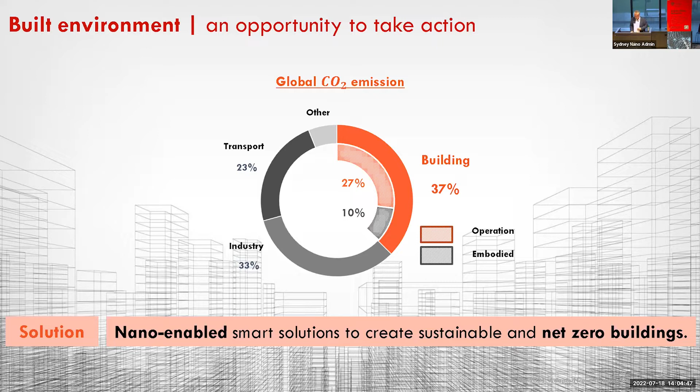Significant. Our hypothesis is that nano-enabled smart solutions are key to enabling sustainability in net zero buildings, and you'll hear more about that from Sydney Nano researchers in the session this afternoon. So Sydney Nano has started a conversation that is around and about reimagining buildings. The Smart Sustainable Building Network is integrating technology, nanotechnology in particular, and IoT to provide solutions to the issues of inefficiency in building construction and use. And of course, that can be broken down in terms of design, construction and operation, and that cascades to a number of benefits that you'll hear about.

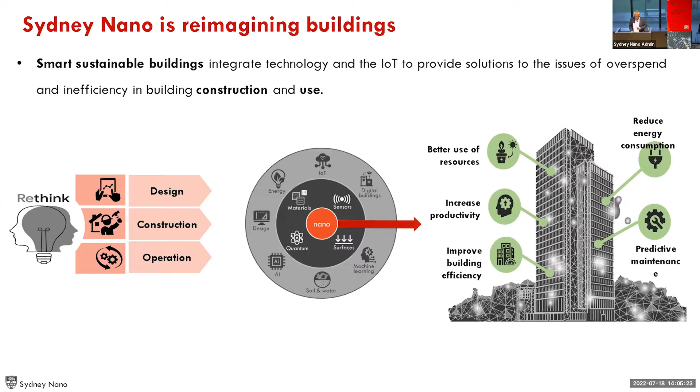And I note the time, so I will wrap up and move to the speaker very soon. Today, you're going to hear from a number of my colleagues across the university exemplifying leading edge research being undertaken here at the University of Sydney and various faculties and schools as part of the Smart Sustainable Building Network. And I look forward to those presentations.

Finally, to be very clear about the purpose of this workshop: on the one hand, to introduce the Smart Sustainable Building Network and its core research capabilities to partners and stakeholders, to build engagement with stakeholders in the built environment, and in particular to crystallise research collaboration opportunities to contribute to net zero emission buildings.

In this session today, you will hear 2 keynote presentations. I will keep them on time, and there will not be a Q&A at the end of those presentations. There will then be 4 very short presentations from Sydney Nano researchers, followed by 5 to 10 minutes of Q&A depending on the schedule. Then we'll have a panel discussion with thought leaders, having a conversation about the future of net zero buildings. This has been filmed, we have a remote audience, and I'll be facilitating Q&A through the pad device.

On that note, I'm very pleased to introduce the first keynote speaker, Jeff Oatman from Green Building Council of Australia. We've had good engagement with Jeff this year, and he's had good engagement with the University of Sydney and the academic sector for many years. Jeff is at home recovering from COVID, so we wish him all the best, and we're delighted he could join us remotely. I won't be introducing people because the bios are online, and we're going to keep this very compact. So I look to Moen now to transition the slide to Jeff.

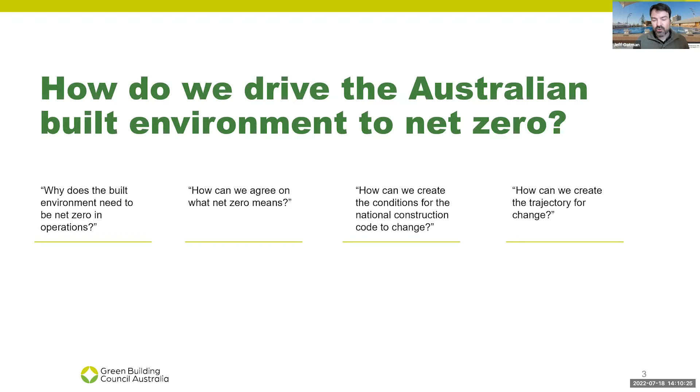Part of what I'll talk about today is how we're trying to lead the sustainable transformation of the built environment around net zero. One of the really big moments in my 10 years at the GBCA that I noticed was coming off the back of Paris and COP21. There's been a number of different things that have happened over the past 20 years in our industry, but that was a very big one.

It really defined a line in the sand where we were seeing things at an international level, and Ben talked about how we don't work nationally anymore—it's all very international. We realized very quickly there's a very big piece of work at an international level on how we get to net zero. With Paris and COP21, and the number of countries around the world, including Australia, signing up to it, we found ourselves asking what this means for the property sector, and what is the role of the Green Building Council in working with our industry and pushing the dial forward around how we get to a net zero trajectory.

Shortly after Paris, we sat down and worked with a number of people in industry, and we wrote up what we call the climate positive roadmap for the built environment. The idea was to draw a line in the sand: if we're here today, and we've got 2030, 2040, 2050, we have to be net zero. What are the key changes that are going to happen across the built environment, the property sector, to get us there? So we put out our climate positive roadmap for the built environment.

The idea was this was meant to be a kind of primer for where things are going, to really help us set the trajectory for where we're taking things—whether it's Green Star, our policy work, our training, or anything else—to help us get to that net zero trajectory. Our climate positive roadmap is available on the website. You can Google this and download it for free, and I encourage you to.

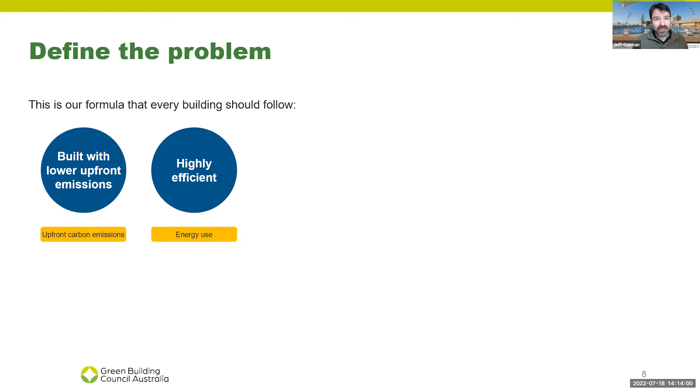In simplest terms, we define a net zero building as one that's built with lower upfront emissions, and Hudson's probably going to get stuck into this in quite a bit of detail, so I won't cover too much of that. One that's designed to be highly efficient, trying to get the load and the demand down. Fossil fuel free and powered by renewables. And then finally, offset with nature. The little yellow bars underneath there are specific credits within Green Star that have been designed to achieve that.

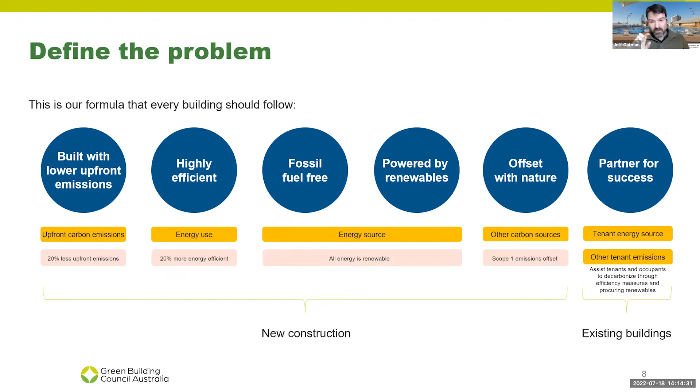Effectively, this is what we're looking at for new construction. Now, the existing buildings that are already in operation, built ages ago, what about those? Well, we have an additional requirement for those, which is a partnership for success, where you're specifically speaking with your tenants and working with them to get the tenant energy sources down. We put a credit around other tenant emissions to focus on that.

To be clear, there's not a requirement that's allowed to offset everything up front and just write a check for it. We don't want this. We want to go back to basics and streamline this going forward.

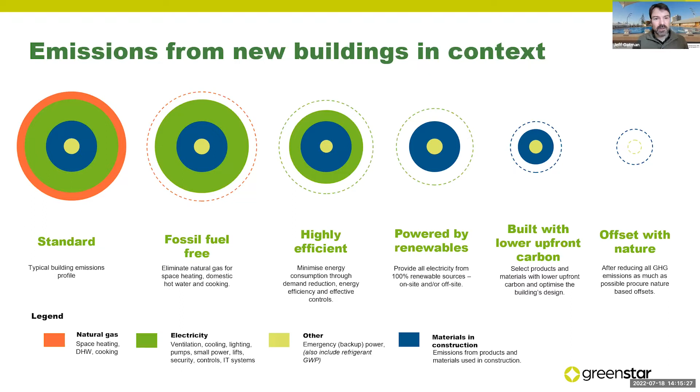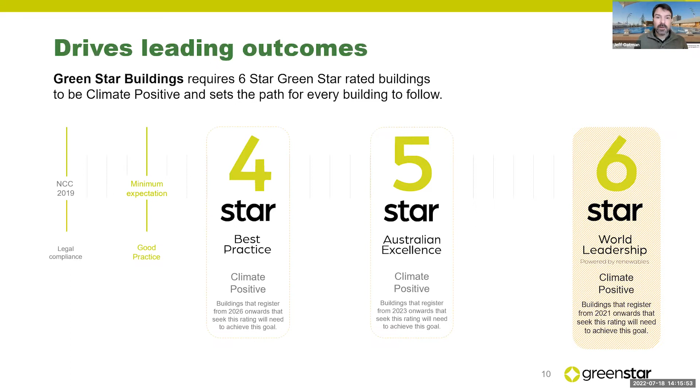So we're sending the message to the market that things are definitely changing with Green Star, and the requirements aren't turning back. Part of the reason for this is to try to set something up for 2030. This is what we've been doing with the Green Building Council, with other organizations like ASBEC, the Australian Sustainable Built Environment Council, a member organization of other peak bodies. We go to Canberra and try to change the National Construction Code and policy to influence this towards net zero. As a result, if we can start demonstrating that changes can be made through the way buildings are designed, built, and operated, it becomes much easier to say, let's talk about a net zero National Construction Code for 2030.

When we look at existing buildings, it's a similar question. What do we do about all the existing stuff? That's maybe the key jewel on the crown here. If we can get that right, what does that look like? So for us, we've got 1 to 6-star ratings for existing buildings. And the idea behind it is progressively the screws get tighter and tighter.

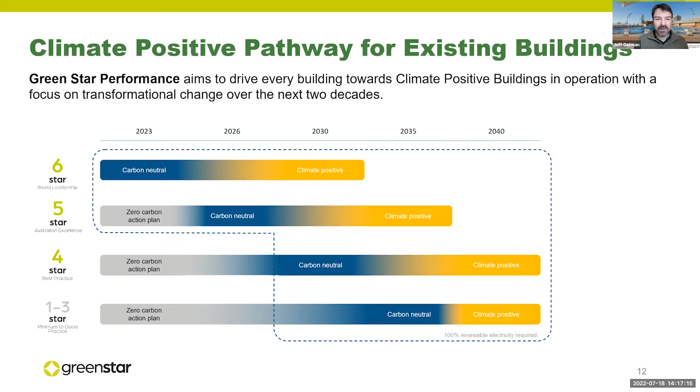We're moving from carbon neutral, which is effectively net zero but you can have gas that's offset, to climate positive, which means no gas and no offsetting required. You have to be off gas completely. As we go closer to 2040, those requirements get tighter. We're still working through the exact details on what year, what lever is going to be pulled, but you get an indicative idea of where the trajectory is going.

We've also been working with a number of leaders in industry. Some people say, that's really great, but how do you actually ensure this is going to happen, and who's driving this? This is an example of one of the global leadership programs we're working on through the World Green Building Council, which challenges organizations and subnational governments to get to net zero for the assets they own, occupy, or control by 2030.

It's very ambitious. You can see the list of Australian signatories that have signed up. There's about 150 global signatories. Australia is definitely pushing way above its weight, as it typically does. These are organizations that have said we're going to do this by 2030 at the latest, and many have already started moving much sooner.

GPT is probably the best example. Their wholesale office fund went net zero back in 2020, so they're way ahead of the game, and we're seeing more signatories sign up.

Separate to this, people have come to us asking how do we work with industry to provide resources and support them. One thing we did was put together a practical guide to electrification for new buildings. We also have another practical guide for existing buildings on its way out. These address some of the things our industry needs and the requirements. We're working with them to support this, and we expect more organizations to jump on board to align with this net zero trajectory.

So I think I'm probably within my 10 minutes. Hopefully I haven't spoken too fast, but I will stop there and pass control back to you, Ben. Thank you very much, everyone.

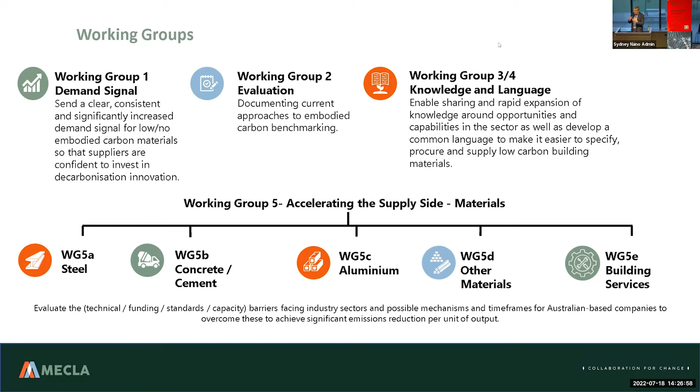And then our material working groups: steel, concrete and cement, aluminium, other materials which is engineered timber, bitumen, ceramics, and so on, reformed plastics. And then building services. They came late to the party because several of, I think it was Lend Lease that pointed out to us, hey, there's huge embodied carbon in total in the systems that make our buildings work. They need a group of their own. So they've come together to get moving and to collaborate.

When we started, we wanted 40 members from the ecosystem. Got over 120 now, which is an embarrassment—it's wonderful how we manage that.

That's the tricky bit. But essentially, you'll see brand names here from the big end of town, from suppliers, the Institute of Architects, Engineers Australia, quantity surveyors, chartered surveyors, customers, suppliers, government procurement—all parts of what I'm referring to as the ecosystem, because together we can move forward, as any one individual it's just too risky.

So this is our systems diagram. I've got a background in energy in the property sector, and so I stood at a whiteboard when we were doing our brainstorming and just drew out project concept, concept design, detailed design, out to market, and so on. But we realized with all the loops and arrows, that said, actually this just isn't linear.

And so the concept of the ecosystem was much more applicable than a value chain. We started to say, well, what are the materials that are involved? What are the barriers? What are the enablers? What are the pressure points that drive action?

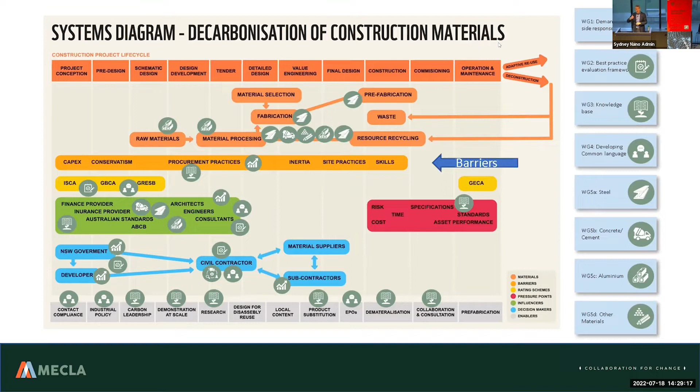So to date, working with government and head contractors around a pledge prerequisite. That's looking at the UK model, which has said, if you want to sell to government, build big projects, your organisation needs to commit to a net zero pathway. That's tricky, but we're working on it.

To measure and disclose, we're in close collaboration with the NABERS program, which is looking at an embodied carbon component to its rating mechanisms. We've released discussion papers on existing standards, the functional units methodologies—that's the top-down, bottom-up piece that I mentioned. And that is really contested.

The idea of, is it EPDs or is it input-output? Is it both? Organisations, suppliers that have invested heavily in an EPD because they're expensive to have done—a very thorough life cycle assessment based approach for many ESG, environmental, social and governance aspects of a material, not just our focus on carbon—they believe that that's the way to go.

Others who are looking at, say, a whole precinct, a whole Barangaroo or a whole Sydney University, they need more breadth of data rather than deep dive individual product data. And somewhere in between, I think, is where we need to meet.

We've developed our website, again, all around sharing. We've done that in collaboration with the Supply Chain Sustainability School, close friends of MECLA. I mentioned our Dictionary of Carbon.

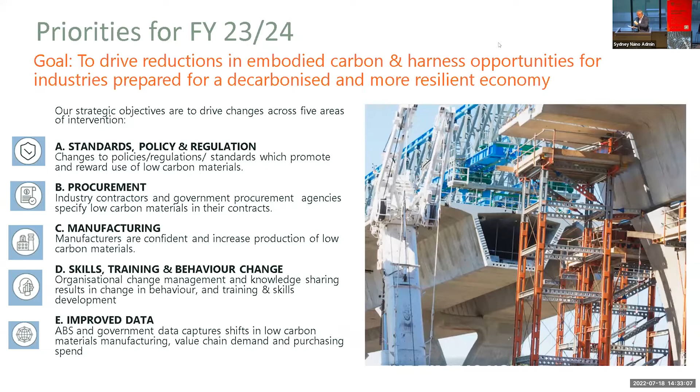And now we move on to a really exciting second phase of the workshop. We're going to have four. We had five, but one of our colleagues has gone down with COVID, as you would expect right now. Very punchy presentations from scholars, from researchers, highlighting unique research, leading edge research at the University of Sydney. And what I love about this session, it really does exemplify the comprehensiveness of the University of Sydney's research and the multidisciplinary flavour to what Sydney Nano is promoting.

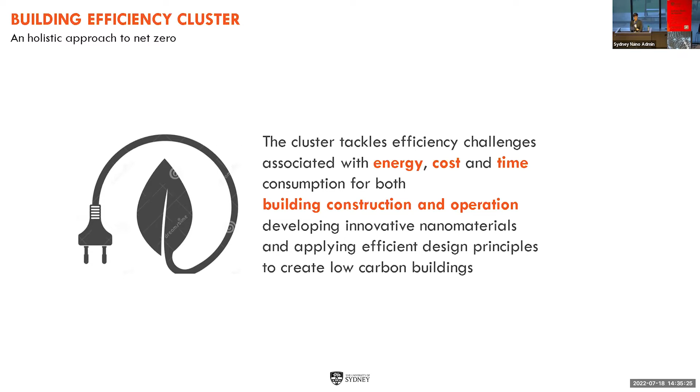So the cluster is composed of a broad variety of different researchers coming from different schools and different faculties across the university. So we have people like myself from the School of Architecture, we have people from the Faculty of Engineering, but we also have people from chemistry and sciences. So with all these different expertise and leveraging all our experience, clearly what we can do is tackle building efficiencies from different perspectives.

So the Smart Sustainable Building Network is quite new, we launched the initiative at the beginning of the year. So as a cluster, we are at our infancy. And what we are trying to do in this moment is weaving all our research expertise together to create a cohesive narrative of what we can do. And what we realized soon is that all our research is built upon three major pillars, and they are, of course, environmental impacts, climate, and design.

And what we do as a cluster is trying to find solutions for future-proofing the built environment, applying a cradle-to-grave approach, and trying to achieve resilient outcomes. As a dimension of research, what we do is really look at multidimensional and multidisciplinary research.

So we started looking at materials, so at the nanoscale, at the material scale, and we moved to components, so how these materials come together in a built environment or in a building, and then how the building as a system works with its climate and with the occupants, but also how all the buildings, when together, can work together.

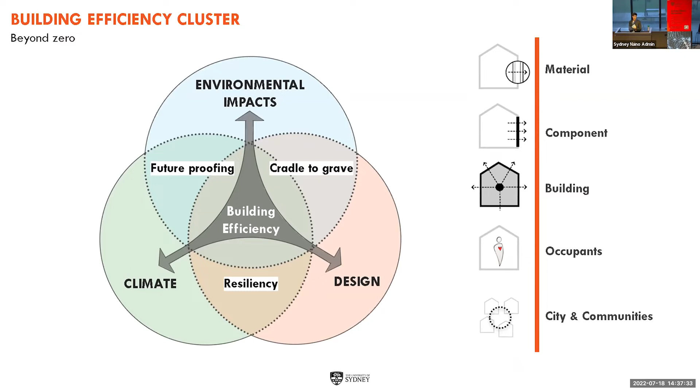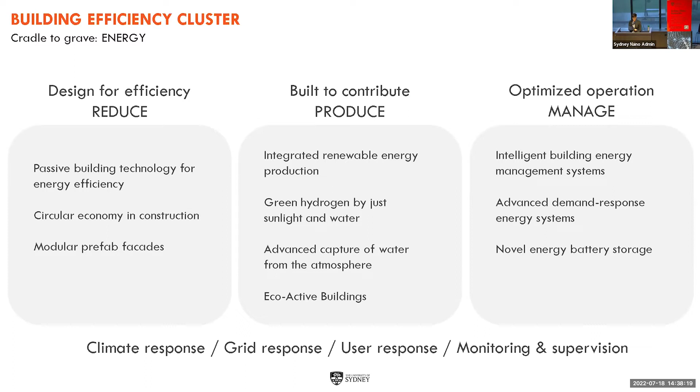So we can't really just save energy or produce energy. We really need to understand how it is better managed inside the building. So what you can see here is part of the research that we have inside the cluster itself. And one unique principle of our cluster is really using prototypes to understand what building efficiency is.

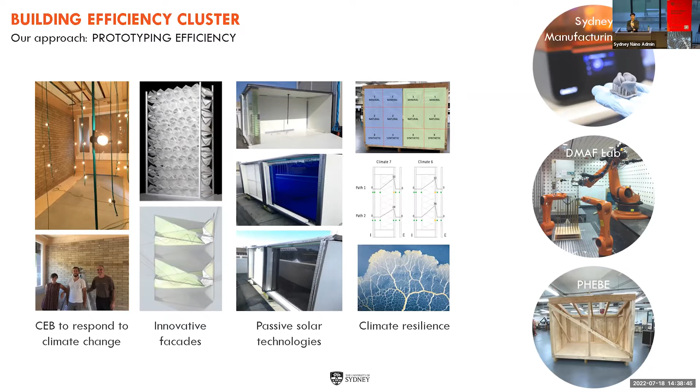So we leverage the infrastructure of the university, like the Sydney Manufacturing Hub, the DMAF Lab in the School of Architecture, or the newly PHEBE prototype in our School of Architecture, to prototype what we mean by efficiency and try to see what are the next steps.

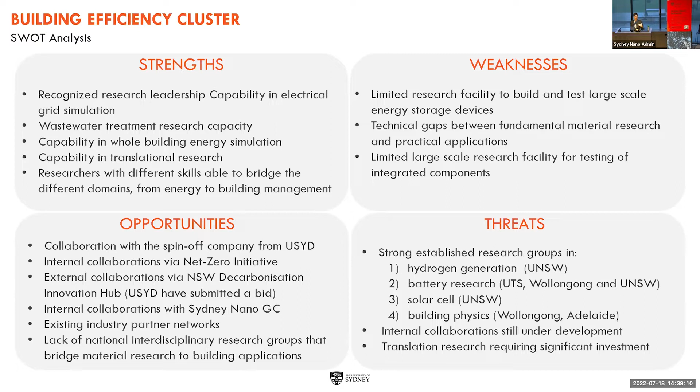And we, like all clusters, try to do a sort of SWOT analysis, and what we realize is that the strengths and the opportunities that we see are really in the network. So leveraging the singular expertise and experience of the different researchers and weaving together all of these into a collaborative approach to building efficiencies.

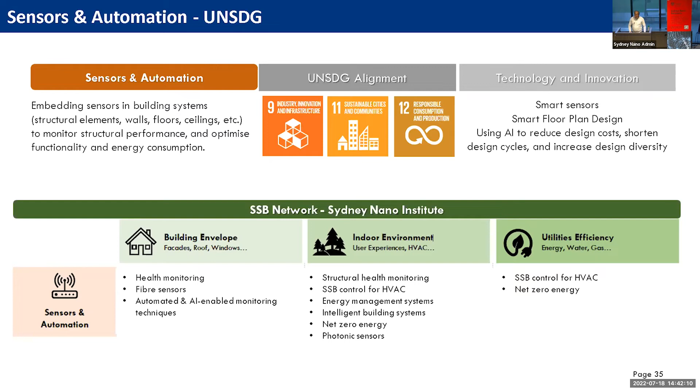Sydney Nano, this framework, this cluster and initiative provides a platform for us to have a really collaborative environment between researchers and industry, to achieve the goals we're aiming for. This cluster has access to different researchers with different backgrounds from different schools and different faculties.

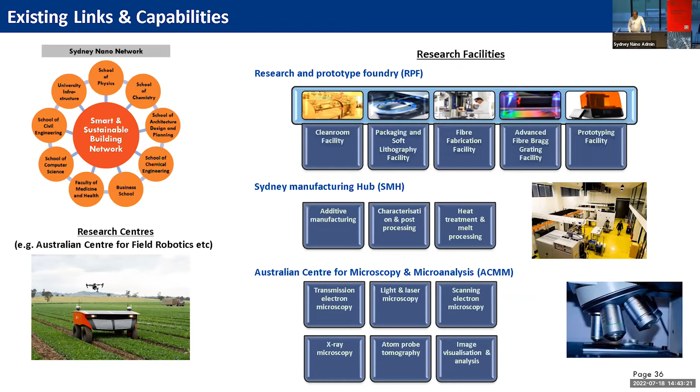Also, we have these capabilities in terms of our research centers and facilities, such as the Research and Prototype Foundry, RPF, which has unique facilities for production of fiber optics in the university. Also, we have access to the Sydney Manufacturing Hub, for example additive manufacturing and characterization and post-processing of metals, ceramics, and different types of materials. Also, ACMM for material characterization provides a very good opportunity for us to achieve the aims of this cluster.

As for projects we've done so far as part of this cluster with industry, we had a project supported recently by New South Wales Smart Sensing Network on fiber optics, using that for structural health monitoring of bridges, and using digital twin and finite element modeling of those bridges in collaboration with Transport for New South Wales. Another project we had was with Laing O'Rourke, again using these technologies and sensors for adaptive structural health monitoring.

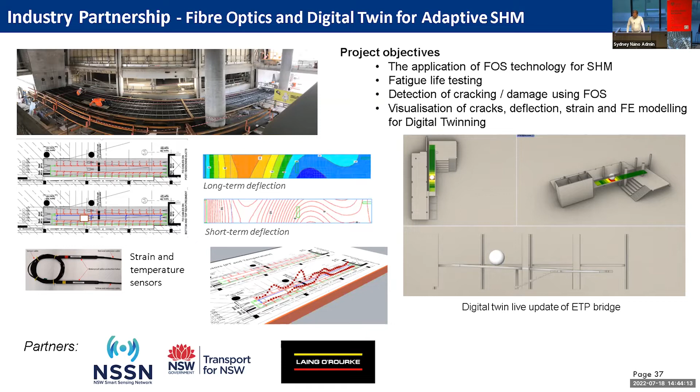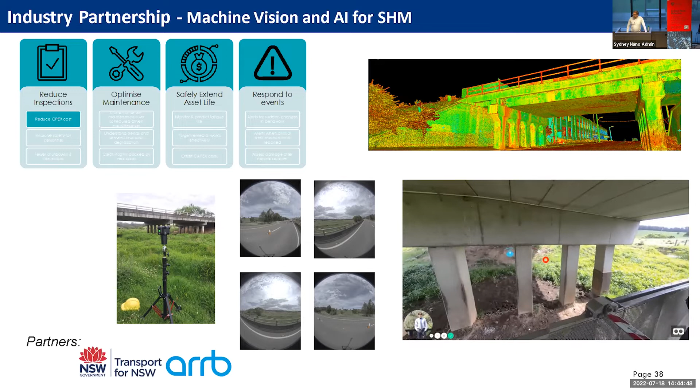As part of automation, we also have machine vision and AI-enabled technologies for crack detection, for example in reinforced concrete bridges, which was done in collaboration with Transport for New South Wales. We are also working with the Australian Road Research Board to develop techniques for crack detection and smart automated structural health monitoring. Thanks very much.

Hi everyone. In my brief talk today, I'll talk about the circular construction supply chain and life cycle management cluster. In this cluster, the aim is to come up with transformative construction solutions that focus on circular economy principles and systems thinking approaches.

There's also a theme of research in the cluster taking place on supply chain assessments, constructing virtual laboratory platforms at different scales - one for Australia, globally, and for other countries as well. That is really to look at embodied carbon, environmental, social, and economic impacts, and coming up with indicators for supply chain performance of construction materials.

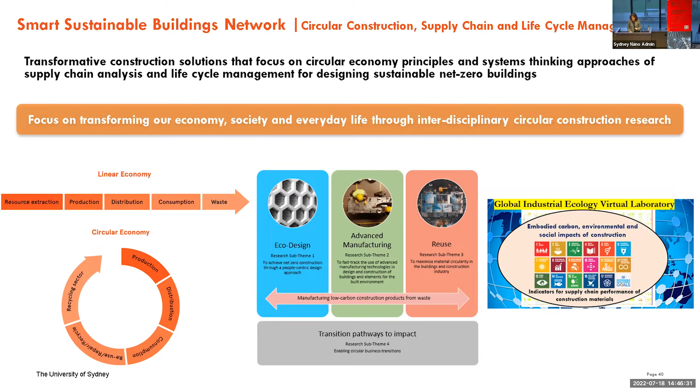In terms of the team, the cluster is co-chaired by Professor Ali Abbas and myself. We have steering committee members, Professor Gwénaëlle Proust from the Faculty of Engineering, Dr. Fabian Sack from the Faculty of Science, and Dr. Sam Kocher from the Faculty of Science. In terms of the broader team of researchers who have expressed interest in this cluster, we have people from the Business School, from Engineering, different schools in engineering, Faculty of Science, and School of Architecture, Design, and Planning.

The capabilities that the cluster offers are on life cycle management. We have research taking place on circular design, footprinting. It's a very interdisciplinary cluster that spreads across faculties, across different schools, on circular construction materials, supply chain analysis, integrated sustainability analysis, focusing not just on carbon but also other indicators to look at trade-offs.

Advanced manufacturing, low emission technologies, so clean grid, for example. What is it really feasible to have a complete renewable energy grid for Australia, and what's needed, what's involved? Do we have the feedstocks? Looking at different energy technologies.

Circularity indicators, and circulytics. The Smart Sustainable Buildings Network, and this cluster in particular, is bringing together industry, government, and global organizations in joint collaborations. So we have MECLA here, we have UN Sustainable Development Solutions Network, we have New South Wales Health. So interestingly, even though the focus today is on buildings and construction, we have other sectors in the economy who are really recognizing that construction is in their supply chain.

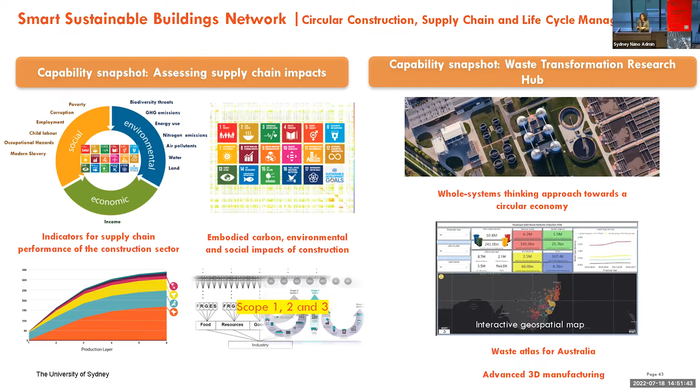So these are just two snapshots out of the many capabilities I mentioned. Thank you.

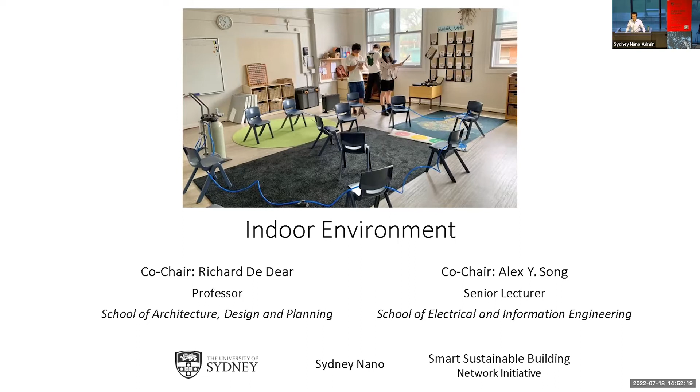Another rule of thumb number is that about 15% of global energy consumption is in the air conditioning of buildings. So needless to say, it's important to understand how we quantify indoor environmental quality, how we relate that to human comfort and human performance, and how we design it better.

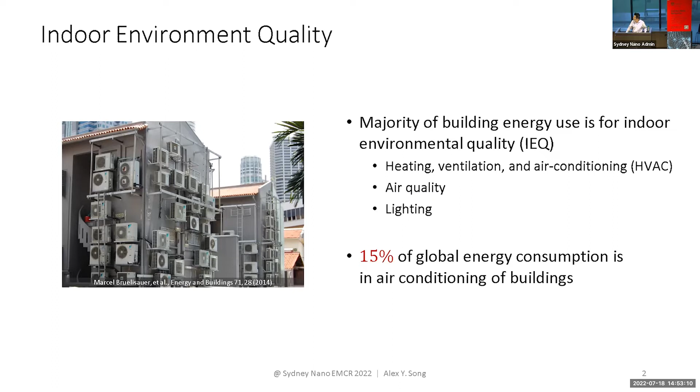So this is what we do. We look at alternative energy efficient strategies and schemes for thermal comfort and human performance. We look at ventilation and air quality. We look at how to quantify indoor environmental quality and how to relate that to human performance. And the overall scheme is to design sustainably for the net zero carbon initiative.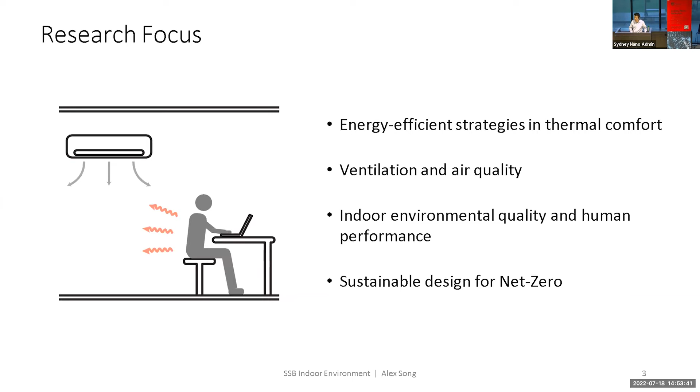For the rest of the slides, I'll give you some quick examples and capabilities of what's going on in this cluster. The first example is the Indoor Environmental Quality Lab, led by Professor Richard de Dear sitting over here. The lab may look like a regular office space at first glance, but behind the walls is where all the different sensors and schemes are installed.

We have different strategies for air conditioning, different mechanisms for moving air, for chilling, for warming, and different sensors. One typical example of a recent project carried out by Richard is ventilation strategies for COVID safety, a study done for School Infrastructure NSW. It basically looks at how we make sure the indoor environment is safe in classrooms and conference rooms with different ventilation schemes.

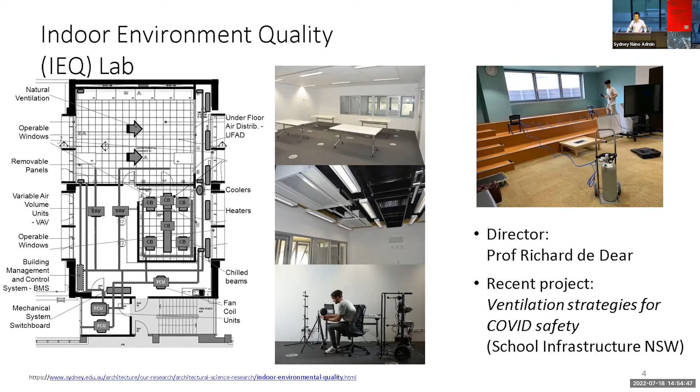Thank you. If you're interested, you can contact Richard for more information. And this is my research.

What we did is look at passive cooling and heating textiles. The reason we did this is we looked at whether we could cool or warm the human body on a local level by the textiles themselves, instead of using AC, so we could look at saving significant energy.

The way we do this is we use nanostructured textiles to control the thermal radiation from our body and control the thermal radiation interaction with the environment. This can cool or warm the human body entirely passively without energy input, and that can save significant energy in air conditioning. This works for both indoor and outdoor environments, in winter and summer.

These textiles were first developed for the human body, but recently we're also looking at applying the same principle to other parts of the building, including windows, indoor surfaces, and facades. Here's a quick image of the new textile we developed. It's very thin.

It looks like a shirt, a white shirt, but compared to a sweater jumper, it looks very cold on the outside because it's trapping all the energy inside. It's a passive heating textile, and it achieves 7 degrees of set point temperature saved in the air conditioning, saving you about 70% of the AC energy.

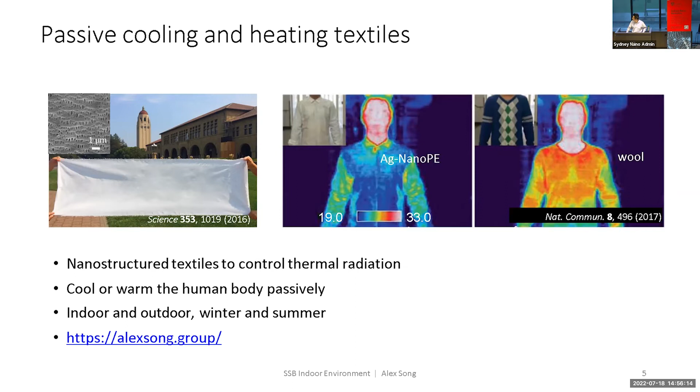One of the research themes in the incubator is the built environment and health. This laboratory can simulate past weather events and predict future ones, controlling a wide range of indoor conditions to extremes, simulating different combinations of humidity, heat, and air quality, and looking at the impact of this indoor environmental quality on physiological strain and performance.

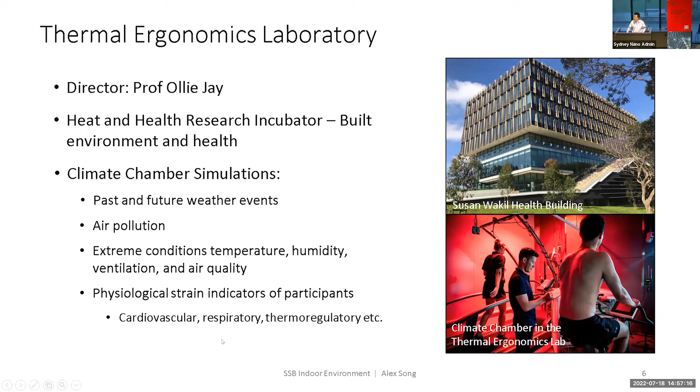So there are many researchers in Sydney that have identified research relevant and of interest to this cluster. If you are interested in what we do, please contact us, and we look forward to talking to you. Thank you.

Oh, wonderful. I want to just acknowledge my colleagues. That was lovely, really inspiring stuff. And we have 10 minutes, we're perfectly on time. So we now have an opportunity to ask the 4 speakers questions, with a panel discussion to dive in more deeply into the keynotes.